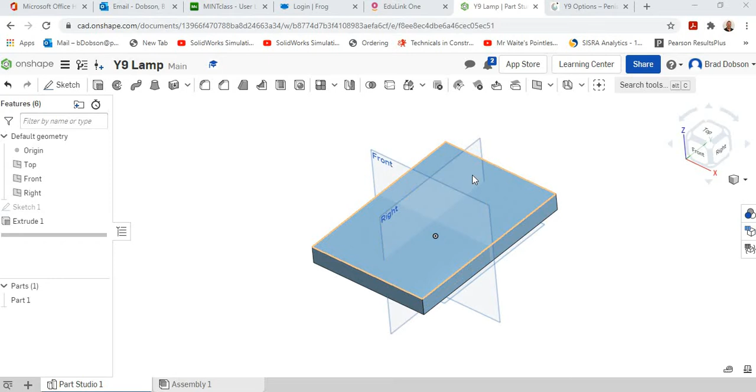Okay, so we've drawn our basic rectangle. What we're going to add now is the two little holes that we use to actually attach our base onto the upright piece that would go in that position. So again, to do that, we have to create a new sketch again. And again, it's telling us and prompting us to create a new sketch plane.

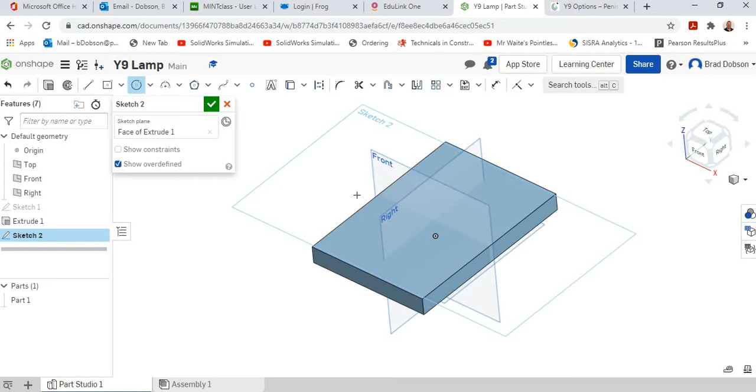So basically, we're just going to hover over the surface we're going to sketch onto. So with that top plane, again, you can see it creates that sketch 2. And then we're just going to use the circle sketch tool to then draw onto our face. Again, you can rotate it round if it's easier. You can also click on this icon over here where it says top. That'll give you a perfect top view. Sometimes that's a bit easier when you're drawing circles.

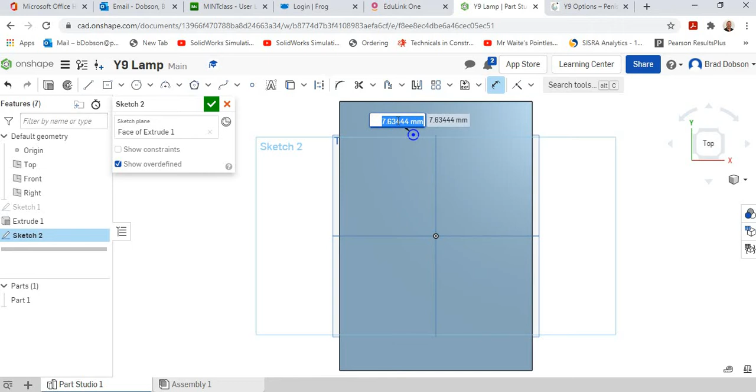So I'm just going to drag out a circle. Again, I always make them oversized and then dimension them back down. So I'm going to make that circle a 4mm circle. Again, just zoom in a little bit. Create another circle. Again, what you can do, if you hover over the original circle and then drag it out, you'll see it produces this orange dotted line. It basically means you want to draw the circle so it's in the same line, same distance from the back. So sometimes that makes your life a bit easier later on.

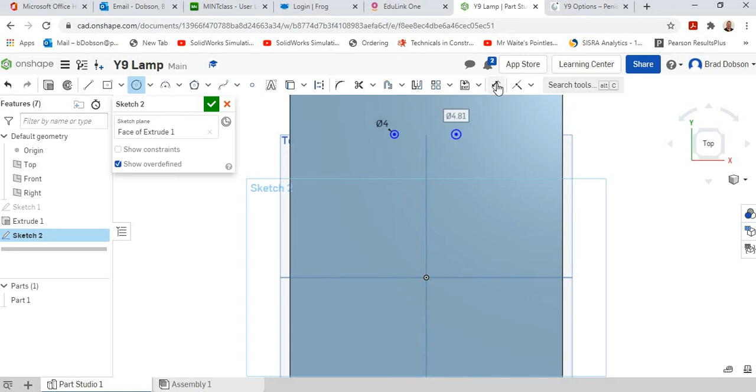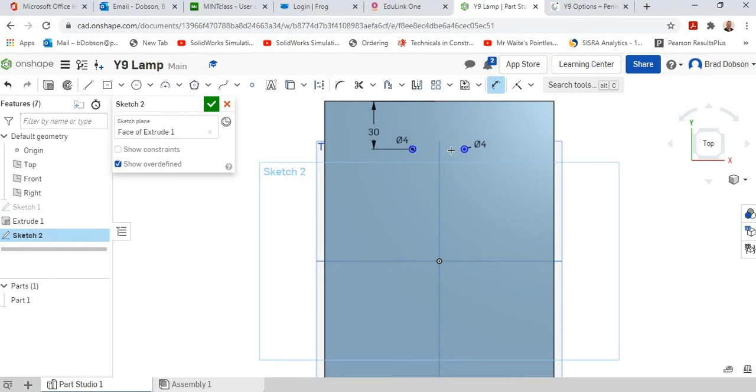Again, just click the dimension tool, dimension that. I'm then just going to dimension it from the back edge. So how far from the back edge? So you can see I've selected that back face and then the centre. And I'm then going to change that dimension to 30mm. So you can see, because I inferenced it, that bit where we did the orange dotted line, it moves both of them out of the way. We then just need to put the dimension in between.

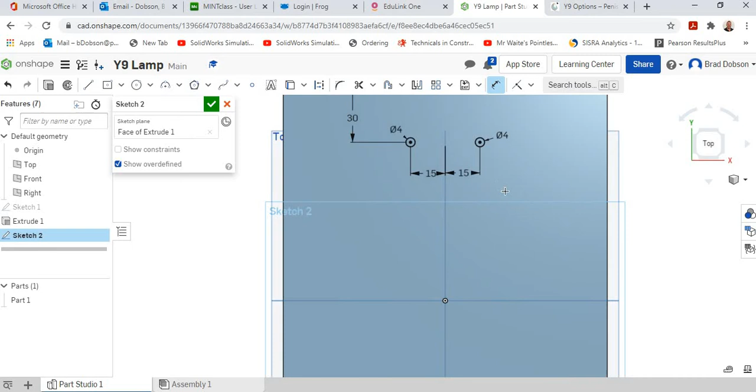So I'm actually going to dimension it from the centre circle to that sort of centre line, which is the work plane. And again, that dimension is going to be 15mm. I'm going to do the exact same, so I'm going to go from that one to that one there and create that one at 15mm. So then we're fully dimensioned where our holes want to be. So again, you could have done it on the angle. So again, two little holes, 4mm diameter, each of them 30mm down, and then from the centre plane, from that work plane, out 15mm. Once you've done that and you're happy with that, click on the tick.

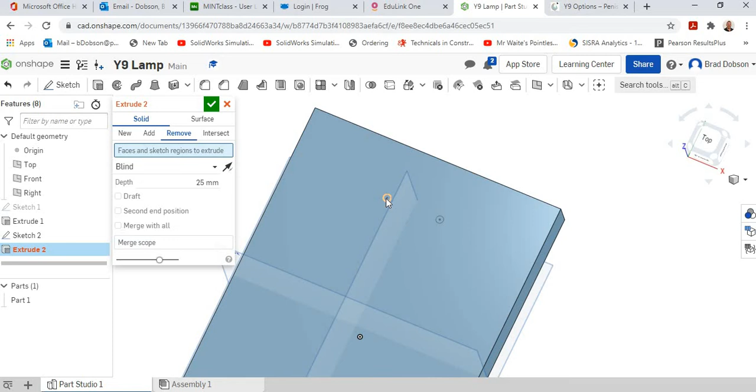We're then going to extrude, but this time you can see we've got a remove option here. So rather than adding material, we're going to remove it. Again, you can see it does this default. We'll change that in a second. What you've got to watch when you hover over it, you think you've selected the circles, but it's actually selected the outsides. You actually need to make sure you're right on the inside of the circle, so just the circle gets removed. Again, you can see it doing a little preview there.

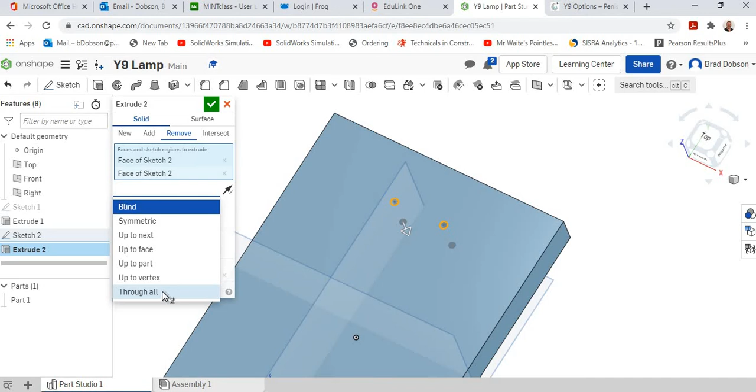Again, we could leave it at 25mm because clearly that'd go all the way through. That'd be fine. We can sometimes use this one where it's on blind. We could obviously change that to any, but if we click on this little arrow next to it, it does the same thing. Basically, we can just do through all. So if we can't remember the measurement and we want to go through, we can just click it on through all, and we then create the two holes in the base. Like I say, that's what we use to screw in our upright.

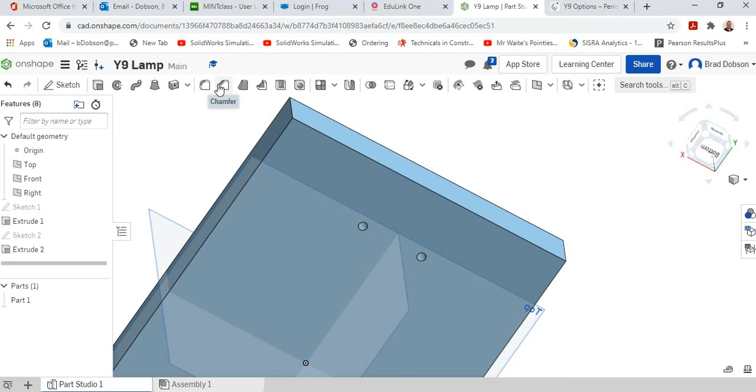What we're going to do, so I'm just rotating around to the back of it. So this is the sort of first, that top plane. We're going to do what we call a chamfer on the top there. So to chamfer it, if you look over on the top here, just below this sort of education hat, there's an icon that says chamfer, and again you can see it's going to basically put a little planed edge on there. At the moment it's set to 5mm.

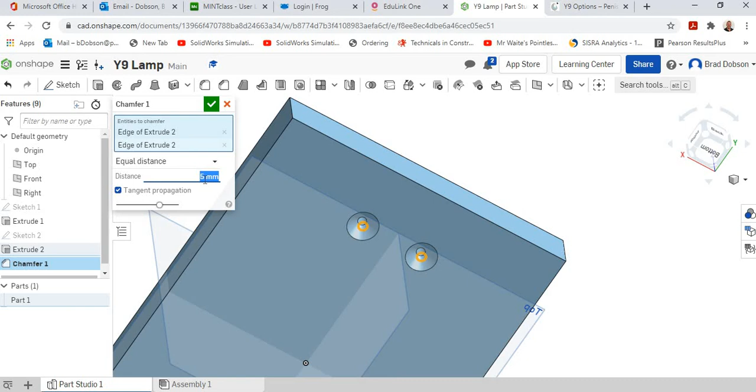Again, the blue box always says what do you want to chamfer, so we click on the inside of the circle. You'll see it gives us a preview of what it's going to do. And we want to change that chamfer to a 2mm chamfer. So click on the tick box. That's just going to create a little countersink for our screws when we come to assemble it all together.

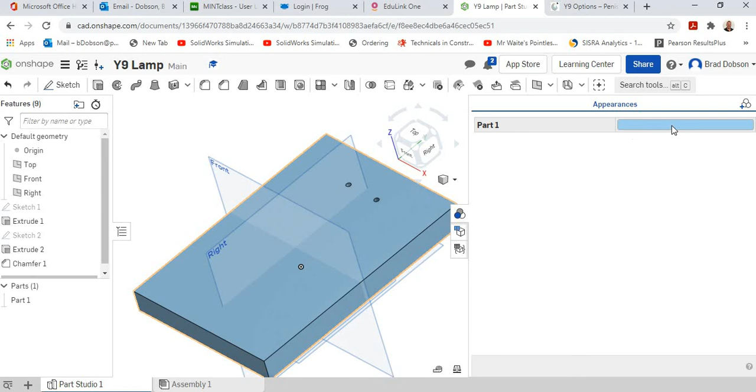Last stage is then to change the colour because our wood's quite often not blue. So all we do is click on the little appearance panel icon there, double click on this blue colour, brings up a little colour palette, and I tend to just choose this one over in the top corner, but obviously you could pick any of these, but you just need to remember which one you did. I tend to go for this one in the top because it's an easy one to find, and we click on the green arrow and minimise that by clicking on it, and we've then sort of finished that first piece.

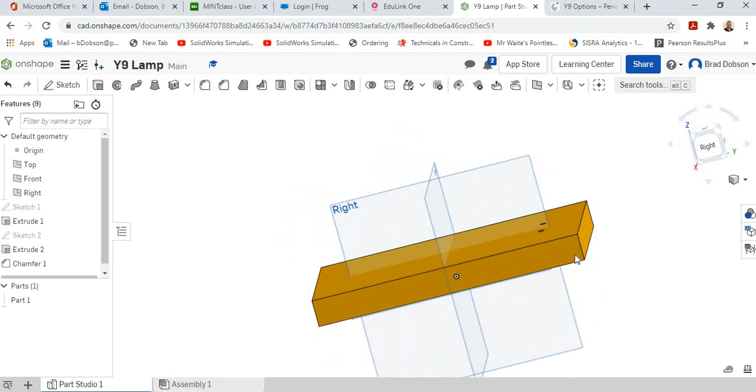As I say, as we get used to the software, you might be able to come back and edit this and chop off the corners and round it over and try and put your design onto it and cut your design that you've designed in our previous lessons. But for the moment, that's that first piece done.